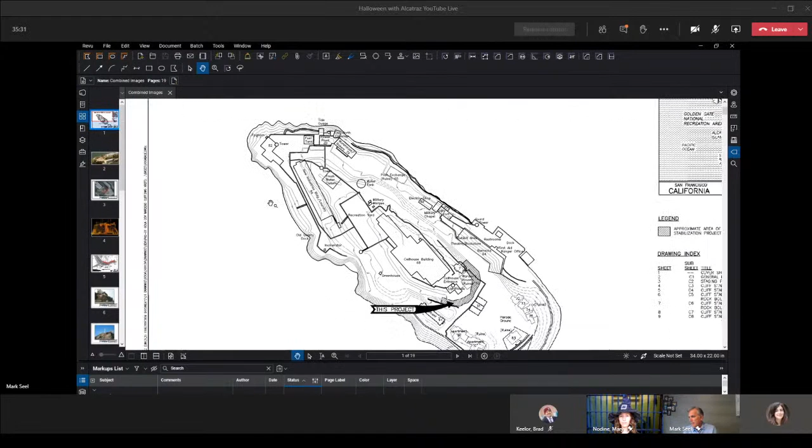Let me open this a little bit wider for everybody and give you a quick plan view of the island. So here again is the parade grounds down in this end. This area around here is the subject of the topic that we wrote on and that we're discussing today. Again, the Cell House building in the back, recreation, and other buildings around the island. One of the things you don't see today is the history: it started out as a lighthouse, and then very quickly became a fortification and a military prison in the late 1800s before being converted into a federal penitentiary in the early 1930s.

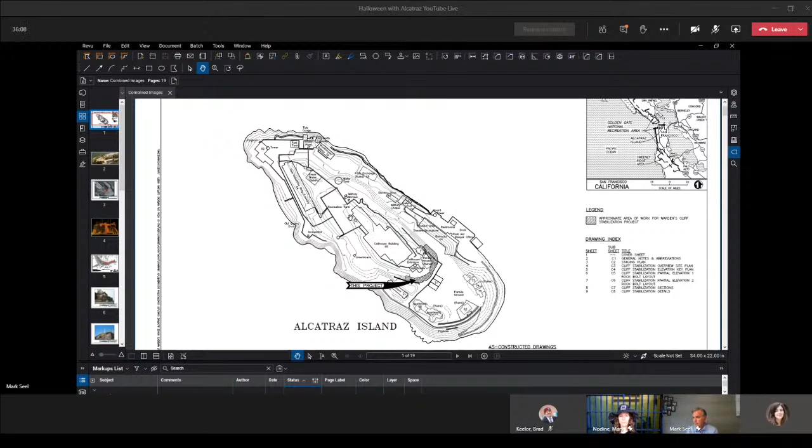So again, here's just discussing what we did. Our charge was to characterize the rock mass beneath the Warden's ruins, and then based on that characterization, we would come up with some options for stabilizing the rock. And again, as I mentioned, we found through our work that there were areas that needed attention, and we came at it in different phases.

Yeah, what's amazing to me about this, and that I didn't understand fully when I first read the article, is that the parade grounds is not a natural feature. I think they were planning to level the island and just blasted it out, and then they're like, oh no, we're just going to stop here. And when you look at an aerial view, it's pretty clear that that slope does not look like it's really going to be in place for the long haul.

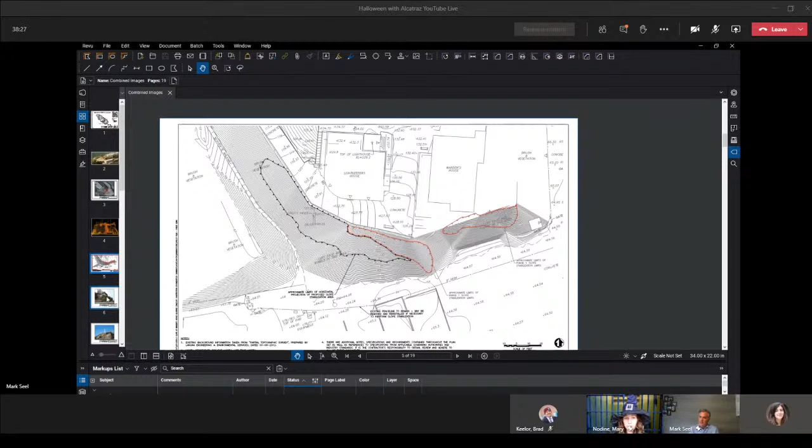And so there's another really cool feature here that I can show you, which maybe I'll have to come back to while it reloads. So we'll come back to that, but it's a really cool image of our 3D laser scanning that we did, because I showed you the still image, which gave you a pretty good sense, but there's other tools that you can use to navigate around it, right?

And keep in mind that some of this work took place over many years. So the images I'm showing you now have taken place over the course of about 5 or 6 years, from the final characterization into the construction. And if you'd like, I can walk you through some of the construction photos right now. Yeah, that would be great. Okay.

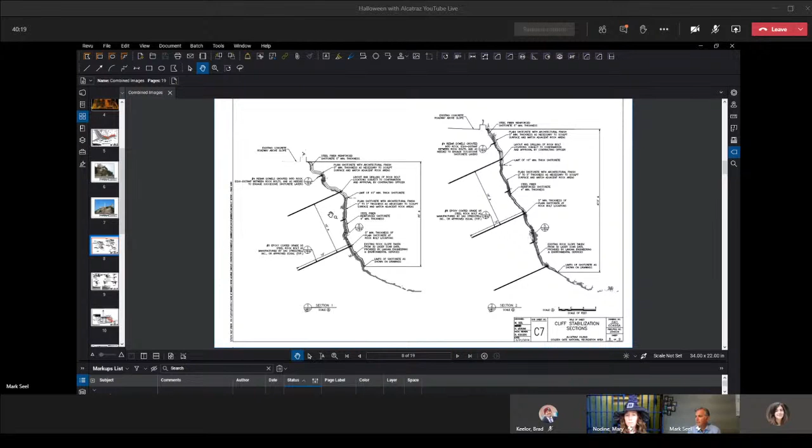So, I'd mentioned earlier that one of the benefits of the laser scanning is that we can use it for construction documents. So what this image shows here are a couple of typical profiles or cross sections. What you see in the shading area is really the point cloud. It's an actual representation of the slope geometry at those specific locations. And from there, we can create these fairly detailed depictions of what we're trying to accomplish with our design. And it shows some rock anchors and a spacing, the type of rock anchors that we're using, type of shotcrete, etc.

Here we have some details, and we're trying to really accomplish many things, which I'll come back to later in this review. What I wanted to draw your attention to here is this planter detail. So we're trying to create crags in the shotcrete that allow soils to accumulate and vegetation to take.

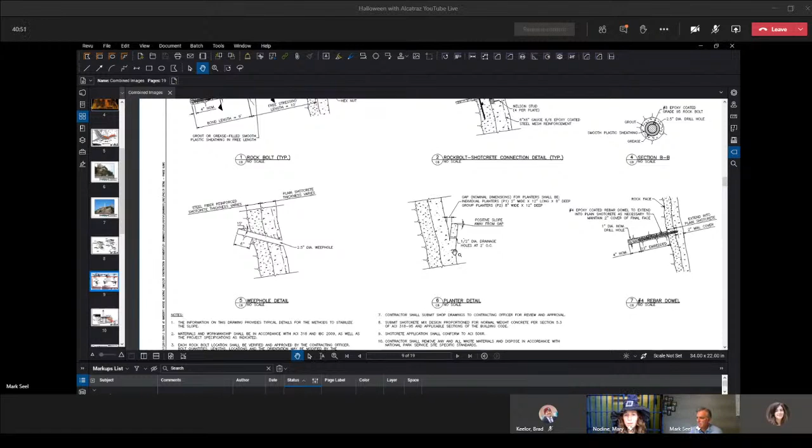Can you zoom in on that more? I sure can. There you go. Interesting. It's easy for me to see. I appreciate your comments on that.

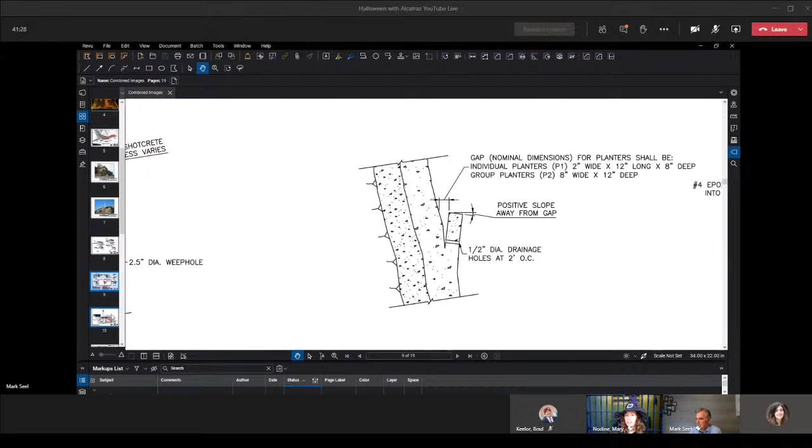So this is just showing some of our structural shotcrete, our dental shotcrete, which is our plain shotcrete, and the size of these planters varied significantly, but it was part of the overall scheme for reproducing or reviving the cliffs. Right, and I understand you had to hire an artistic person to actually design this shotcrete facing. It wasn't just a standard shotcrete facing that we would do for a soil nail wall, correct?

Yes, that's right. So it was done in a couple phases. We took care of the design of the structural shotcrete and the thickness of the plain shotcrete, but the one thing still needed was matching the final color of the shotcrete, which would be tinted and sculpted, putting joints into it to match the surroundings. And Boulderscapes is a company that leads the way in this, and they're located out in California as well.

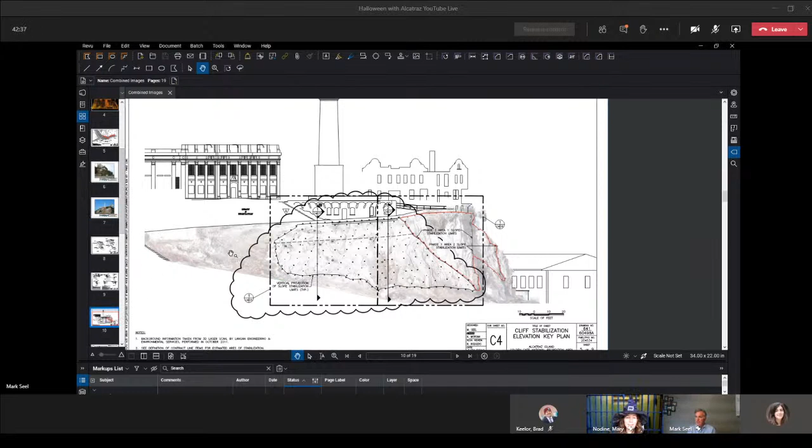And so they were brought in to consult and work with us and the design team on coming up with the strategy for that. So there were test panels that were shot, and the owner was involved in selecting a certain tint and sculpting that they felt best mimicked the original conditions. Right. Yeah, that's interesting. Not your standard shotcrete wall.

Correct. And now this is a point cloud from our laser scanning, so you can see the pretty good amount of detail when you really zoom in here. Oh, yeah. You get a good sense of the texture of the rock as well. So they're very helpful in design and construction.

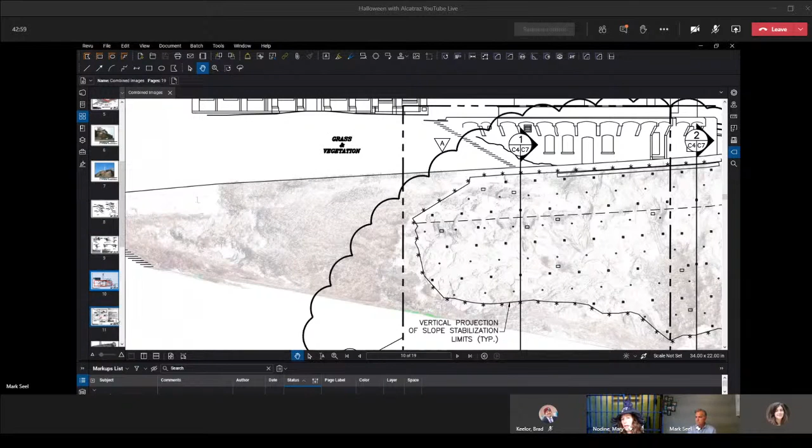So you did the laser scanning, and I understand you did rappelling and more manual rock mapping earlier on, in the early 2000s. Is that right? That's correct. So early on, when the project first started back in the early 2000s, there was rappelling. So we went in to collect linear data.

So we would collect the mapping of discontinuities, or joints and bedding. Geologists would come in and rappel down the cliff, and you would do these very detailed lines and collect data on the bedding, on the jointing, the attitude of it, the dip direction, the length, trace length, and any other data that you needed to glean out of here, whether it was weeping water, dry, joints were open, etc. All that data was collected by rappelling, and then when we came back out in 2010, we did some verification of that.

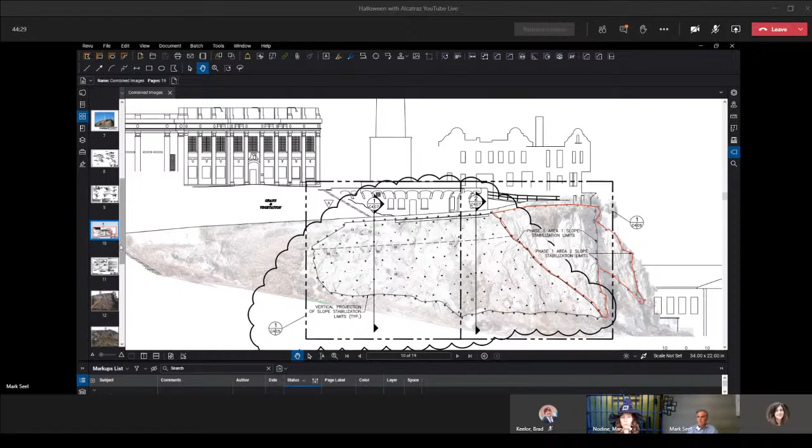We also did some updating of the mapping, and then we used that data with the 3D scanning to integrate all of our data and help develop our design, which was a separate process, because once you have all this data, there are some options on how to go about stabilizing the cliff. From there we went through the design development process of determining what that would be. And this was ultimately chosen, and a little bit later we could talk about some of the other options that we had available to us.

So here I'm just going to go through a few of the construction photographs. You see this is on the west side, where rock had been cleared off, and through a series of colored dots, different size dowels, bolts or anchors were drilled into the rock at different angles, which was provided on the drawings, but overseen by our folks.

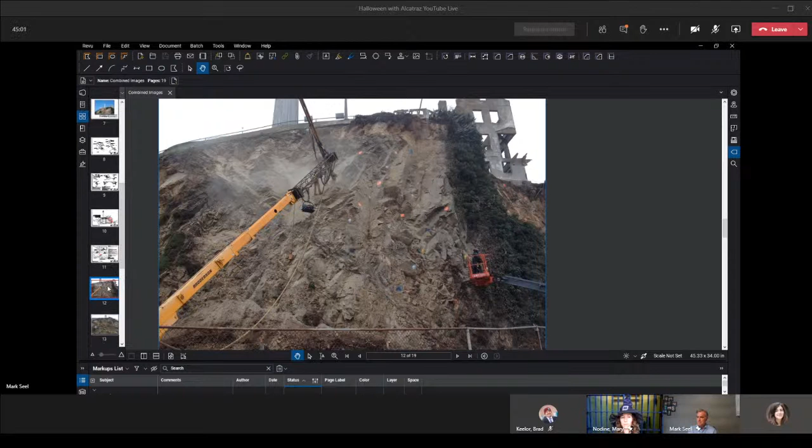Here, what I wanted to illustrate is some of the structure. I talked earlier about the jointing that we found. During our assessment of that data, we did kinematic analysis. We're trying to find the most kinematically possible joint failure geometries that exist. And you can see in here, this might be a little too tight for a wedge, but it certainly looks like a wedge, and then you get a lot of plane failure. So blocks were coming off, and some of these rockfalls were more pressing than others.

So here's some of the shotcreting underway, and between the structural layer and the plain shotcrete layer, there was epoxy-coated steel used to reinforce the face that was trimmed and shaped to fit the rock face. There were bars that were put in, some anchors, and some weep drains that were drilled in. You can see here in the next shot the actual application of shotcrete along part of that face, roughly in the same areas the last image shows.

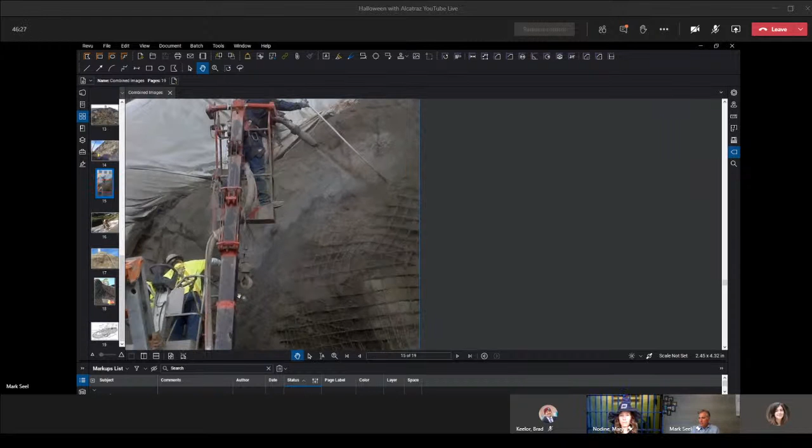Yeah, it was a well-controlled process by the contractor. And after you get done with part of it, there's some testing, of course, of the rock bolts and anchors, and that was all done high up on the cliff face, and people were rappelled in to oversee that work and perform that work.

Then here, what you can see is part of the cliff face again. This is after the shotcrete's applied. The rock jointing was notched into the plastic concrete. And then this is the tinting, and you can see in here already that there's some variability. It's not just simply one coat of a distinct color. There is some variability that's applied to it. It really has an artistic flair to it to try to mimic the natural face.

And this image here shows the other side, where this is Warden's ruins. And you can see the jointing's cut into it, and a lot more coloration. I think the color differences often have to do with the shading and time of day as well. So now that's an overview of the project from 30,000 feet.

That's pretty cool. And so in your article, you say that the mission of the National Park Service was to preserve unimpaired the natural and cultural resources and values of the National Park System for the enjoyment, education, and inspiration of future generations. I will admit that when I first read the article, I was a little wary of how a shotcrete rock facing would really fit within the spirit of this mission. When I thought about the fact that the rock face was man-made in the first place, that changes my opinion a little bit. But how did you work with the National Park Service to ensure that you were both maintaining the island's integrity while ensuring the safety and longevity of the park?

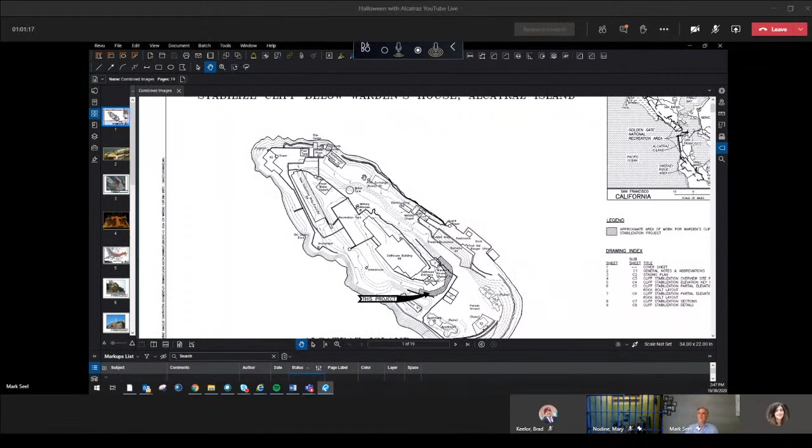Okay, so one of the interesting things that happened on the island, and I'm gonna bring my screen up again, is, as I mentioned earlier, the site was a former citadel. So back in the 1800s, go to the plan here, when the island was first constructed, up in this area here there was a citadel, a fort. So there was a fort and a military prison that was built here, and a lot of it was brick.

And as you can imagine, it's very difficult to bring materials onto an island, especially one in troubled waters. And there's limited materials available on the island. However, there is an abundance of rock, some sand and other soils. But any cement or concrete would have had to have been imported. So, in the interest of repurposing the existing materials, often they used rock from the island as aggregate in concrete.

They brought in cement. When they knocked down the Citadel and the old prison, they crushed that brick and used that as aggregate. So you've got repurposed brick and some stone, and you mix it with the cement. And the one thing that's missing on this island is a supply of fresh water. But there was an abundance of seawater, and so that was used to make a lot of the earlier concretes for some of these buildings.

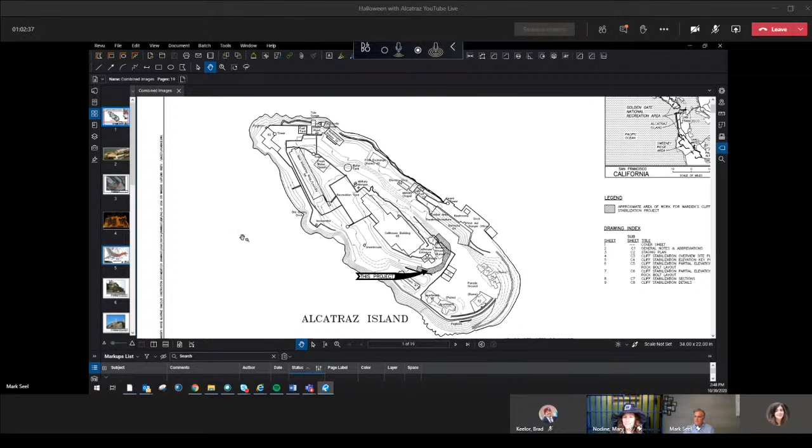And so you imagine using salt water in your concrete. There are some durability issues you could expect, and over time some of the structures were in states of decay, and that led ultimately, in my estimation, to the closure. You had a series of attempted breakouts, the last one in '62, and then you had the physical decline of many of the structures as well,

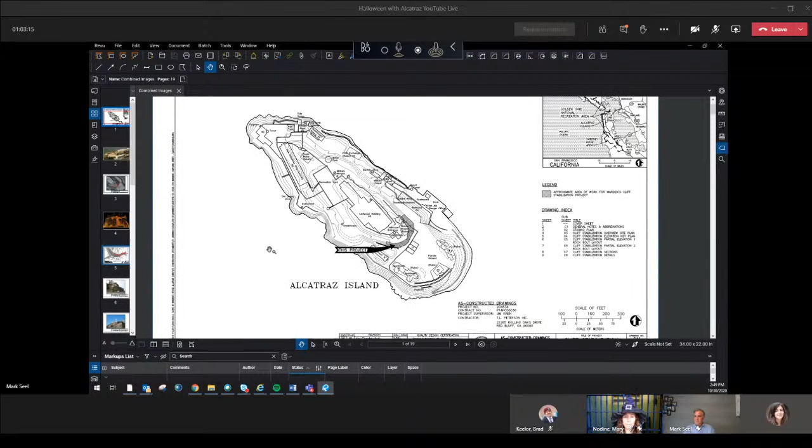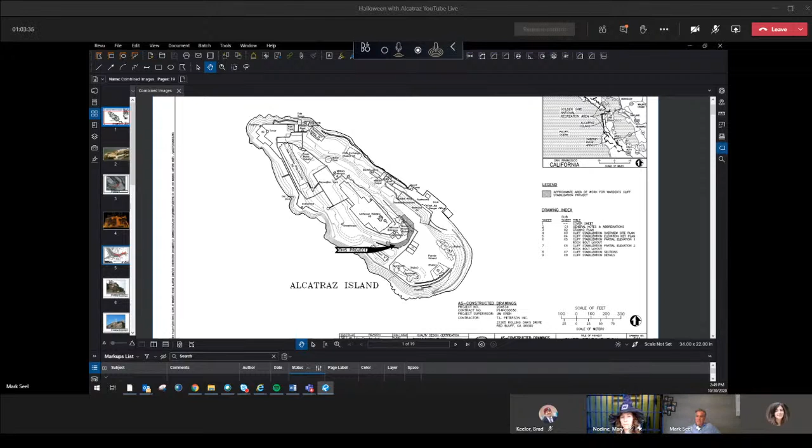which hastened the departure of the old fortress and the creation of the new penitentiary, and at that point they were using some of those mixed materials for construction of some of these older buildings in the federal prison, like the cell house building, for example, and that kind of leads me to a ghost story if you're interested in hearing about that.

Yes, I mean, here I am in my jail cell. I've been waiting for it this entire time. So yeah, go for it.

All right. So we've already established that the island is a rock. When you build all this infrastructure on the rock, you've got to carve tunnels in for utilities. In fact, what little fresh water there is was held in cisterns buried underneath some of the buildings, going back when the penitentiary was operating. At one point, probably in the late '90s, there was a need for some work in the cell house area.

So there was some seismic retrofitting that had to be done. The issue was that there was crumbling concrete here and there, and new seismic codes in California carried certain requirements. So there was a project we were involved in, and we did our investigation and analysis and determined that some shear walls had to be installed in the cell house building, and that was going to require new, fresh concrete. So all that was imported and brought in.

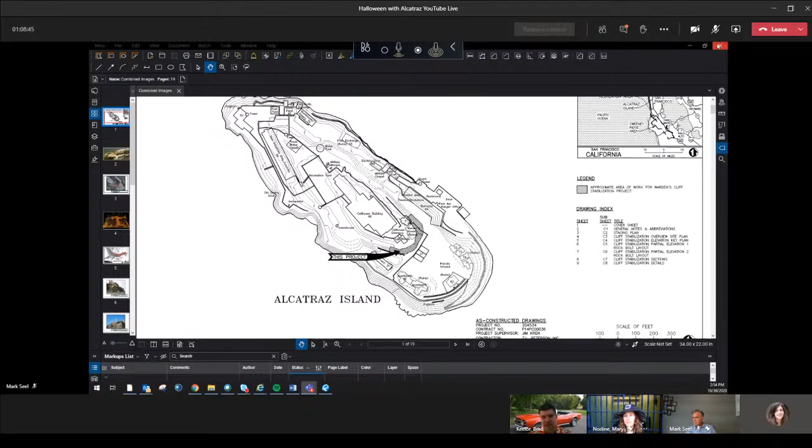When I was thinking, what can we do that would be cool for Halloween? I thought, oh, there must be some issue somewhere geotechnically with something spooky. And I Googled GeoStrata Alcatraz, and I got this. I didn't even remember that we had done this article. So thanks to my late night Googling skills, I think I emailed Mark at about 1 a.m. saying, hey, would you be willing to do this? And the next morning he said he was up for it, and we plowed ahead.

So thanks to the audience for joining us today. Now you've opened the door to interviewing authors from the last 20 years of GeoStrata. So, we totally could. Watch out if anybody wants to see anyone interviewed from any GeoStrata old favorites. Brad's probably game. I was really sad that there's no land at the North Pole, because I thought surely we can do a special Christmas episode, but alas, there is nothing there.